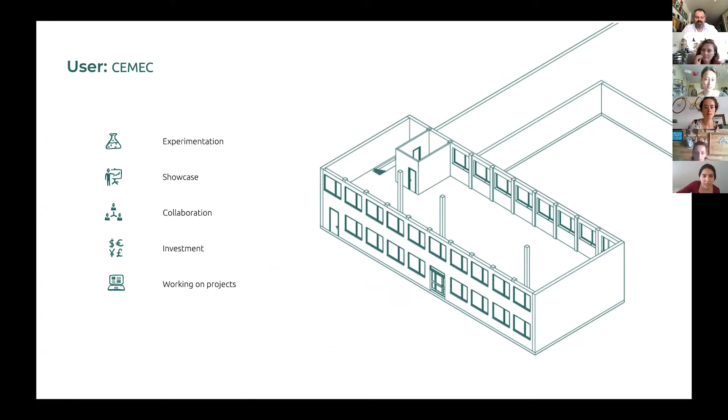Hello, everyone. Today we're gonna tell you about how the U-shaped modular furniture series are created. We designed this furniture for CEMEC, a center for circular innovations. In this center, a multitude of functions will take place, so the furniture should be ready to accommodate the changing needs. We used recyclable and environmentally friendly ECOR as our main material.

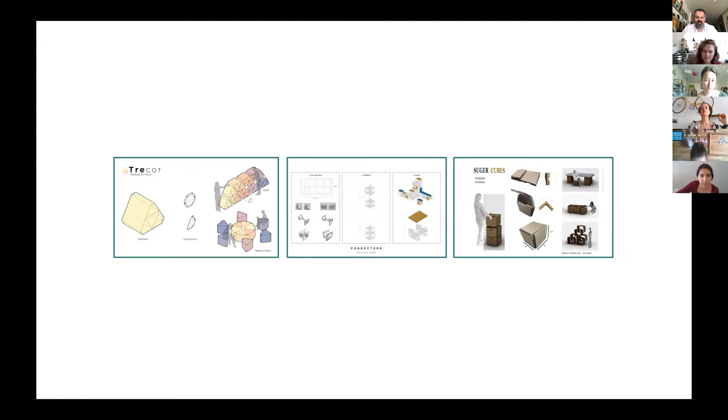The three of us showed interest in modularity in the first weeks. So Doris, Natasha, and myself, Sahar, joined to realize our vision. Our vision was to present a design which encourages the users to easily and quickly reconfigure their working environments. And these units can become storages, seating, table, as well as other combinations. This design should also support sustainable and circular principles of ECOR.

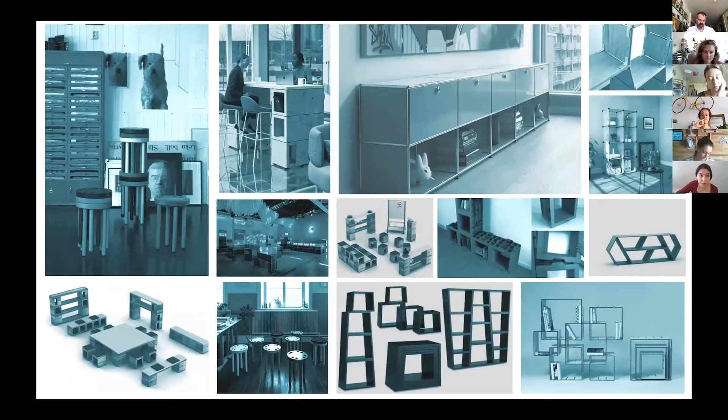We explored the existing modular furniture systems in the market, we developed our own concept, and we put them into a matrix. The concept with the highest grade was ready to be developed further. That concept was the half-box module, which was later called U-shape. It is a box with two sides removed and split in half, and the structural plane is added to the center. This module proved to satisfy all our criteria.

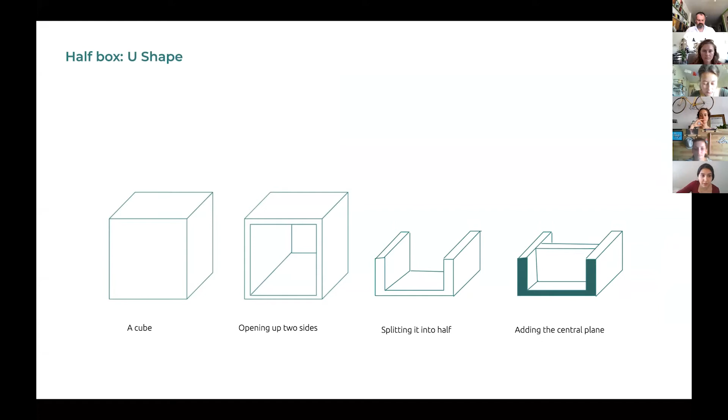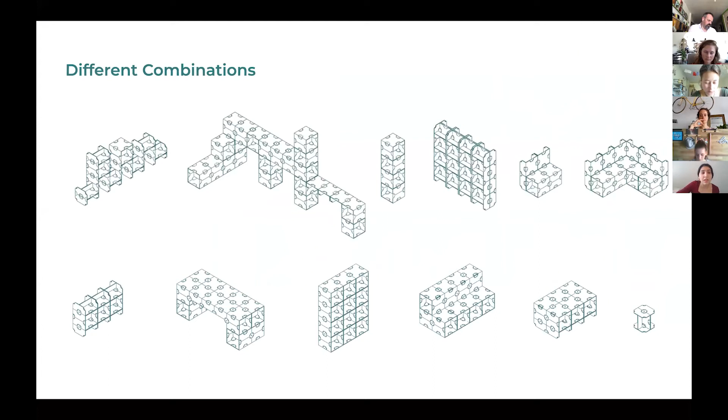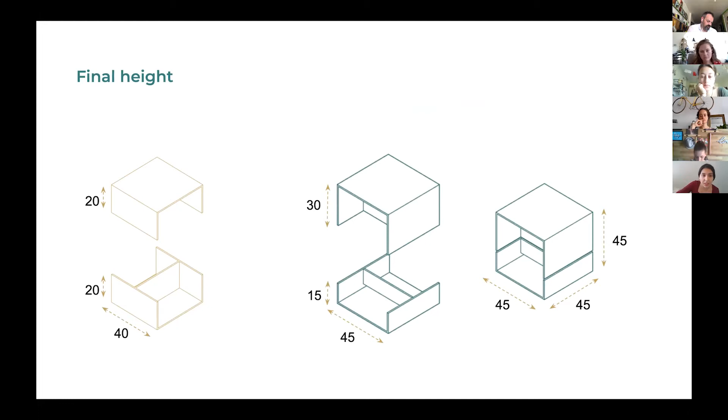We had puzzle pieces as our initial connection idea. We started making different furniture with the U-shapes. We combined the furniture into different scenarios, and we became confident that this module is promising. And then during the process, we realized half box should not be a half anymore. A cut that makes modules of 15 and 30 centimeter height proved to be very useful. With this size in a chair and desk combination, the user will have enough legroom under the desk, and the height of 75 and 45 are respecting the ergonomic standards.

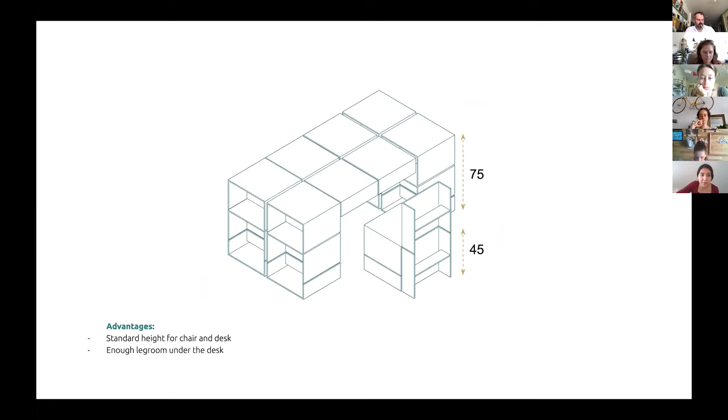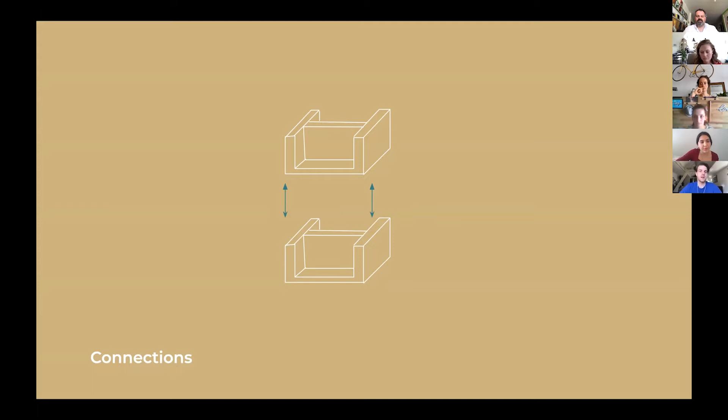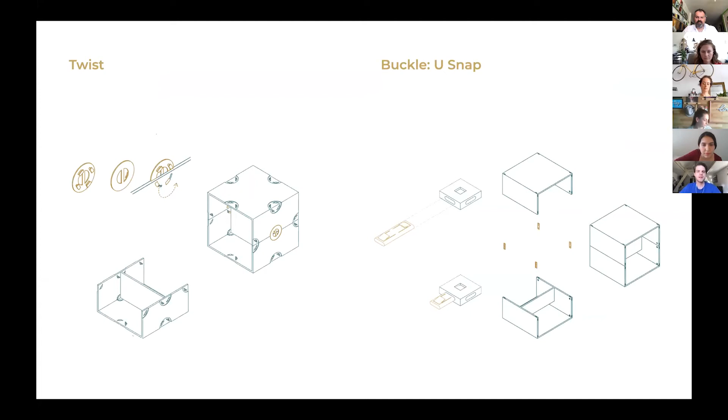After that, our next step was thinking about how to connect these modules together, and Doris will tell you more about that. Yep, so for connecting the modules together, we followed the same approach as for the module design research. By first analyzing the strengths and weaknesses of various references, we were able to come up with a variety of our own connector concepts. Afterwards, these were graded and sorted according to our own vision and design criteria for the connector. The two strongest concepts were selected for further development during the building weeks: the twist and the buckle or U-snap.

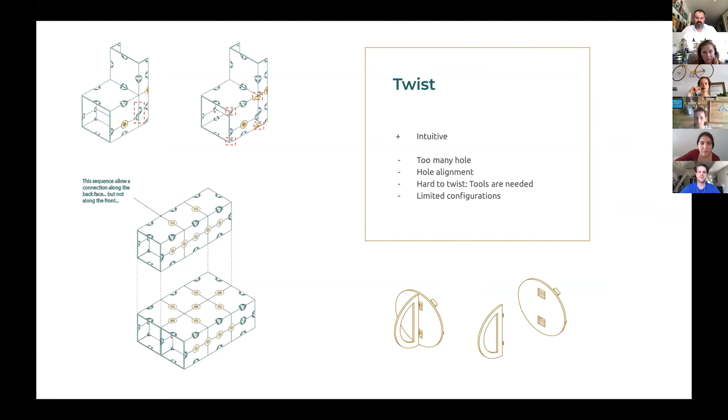Twist consists of a disc with 4 hooks which can connect up to 4 modules. It is both quick and easy to install without the need for external tools. Twist is able to achieve a lot of configurations. It is capable of connecting modules both horizontally and vertically. Despite this, we felt it had too many limitations. The modules had to be stacked and connected in a very specific order for certain configurations.

The buckle or U-snap is a connector which snaps into place using the elastic deformation properties of plastic. Because it slides in between sheets of flat core, it is discrete, fast, and an intuitive way of connecting 2 modules together. Because of this, we chose the U-snap as the most promising connector concept.

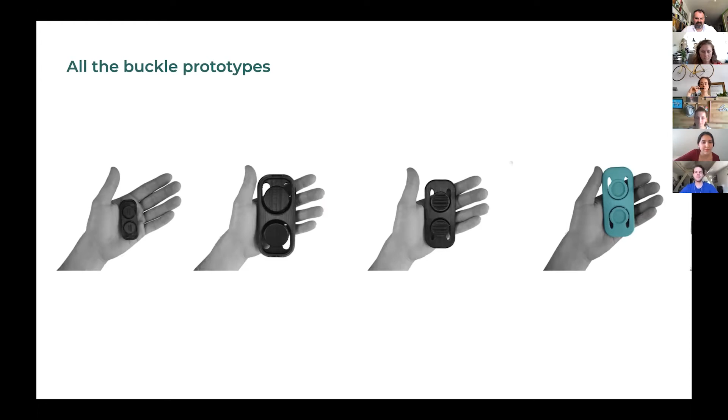During the design weeks, a total of 4 different prototypes were produced. The first prototype ended up being too small, so we scaled up the second prototype to test the principle with 18mm MDF sheet. It worked great, and because we really liked the larger size, we made the third and fourth prototype larger too. Here you can see the first, second, and third prototype being tested. By the end of the building week, we had a working prototype scale 1:1 made out of eCore, which we were comfortable with moving forward.

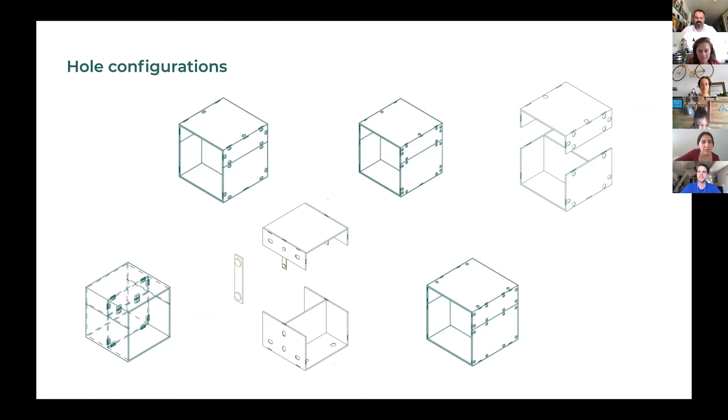We tested a variety of hole configurations, each with their own strengths and weaknesses. We also tested the principle of a larger connector with shared holes. However, this turned out to reduce the amount of configuration significantly. So in the end, we chose a configuration with only 2 holes on each side of the module, and 2 holes on the top and the bottom sheets to connect modules sideways.

A problem arises when you try to disconnect modules from each other. Fixing the U-snap into place is dependent on the movement of the connector itself. In other words, if the connector cannot move or deform, it cannot unlock. This causes problems in many scenarios where multiple connectors need to be unlocked and moved simultaneously.

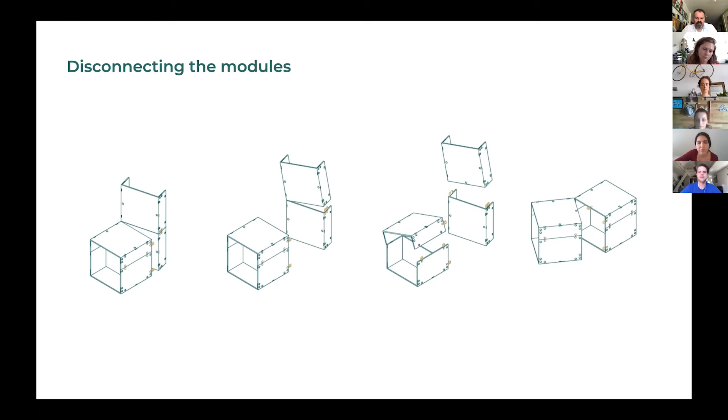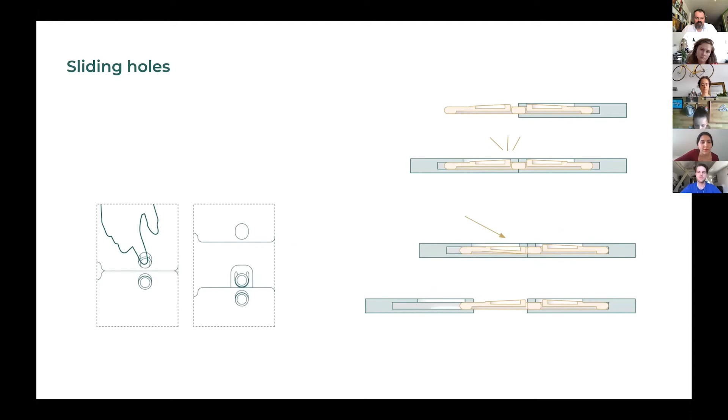To solve this, we had to make the locking of the connector independent of the movement of the connector. By elongating both the internal and external holes, it is possible to unlock the connector while still keeping it in the same location. This means it is possible to unlock multiple connectors simultaneously before starting off the module.

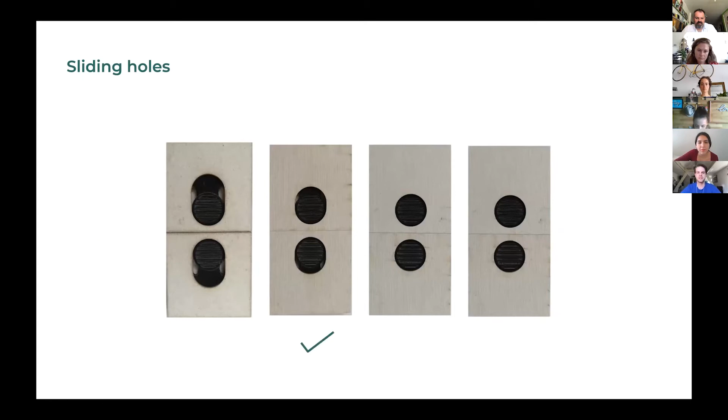In the building weeks, we determined that an internal and external elongation of just 5 millimeters worked best for the U-snap connector. Finally, the U-snap design was completed by adding a hole to the bottom, making sliding easier to do.

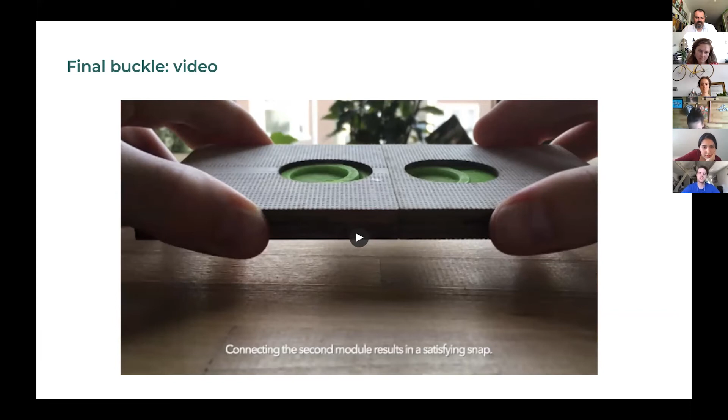So with both concepts for the module and the connector done, we were comfortable moving to the refinement stage, which Natasha will tell you all about. Yeah, so we reached a point where our design was beginning to take shape, and we took some final steps to make it into a finished product.

And we had initially aimed for the modules to create a desk based on the arrangement on the left, but we realized this wasn't going to work very well due to the moving sliding connection, which would always result in a sag in the tabletop. So we needed a tabletop which could bear onto some supporting modules as opposed to relying on the connection, as

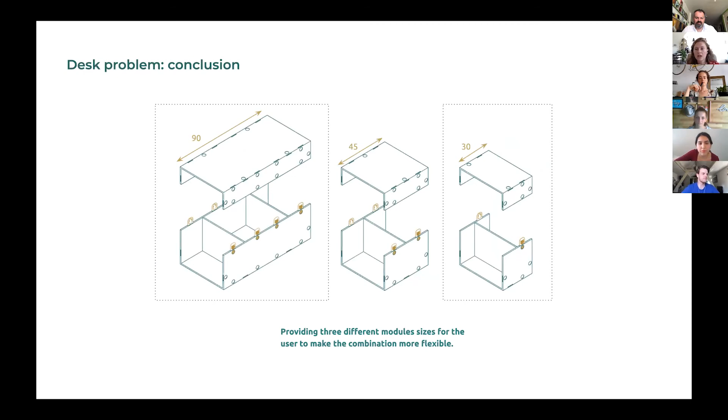shown on the right. Therefore, we introduced new module sizes that are 90 and 30 centimeters long, which allowed us to make much more usable tables and chairs without relying on the connection. And you'll see these in a few slides. We also looked into the finer details here, such as rounding the corners for practicality and adding a handle to make the units easier to carry.

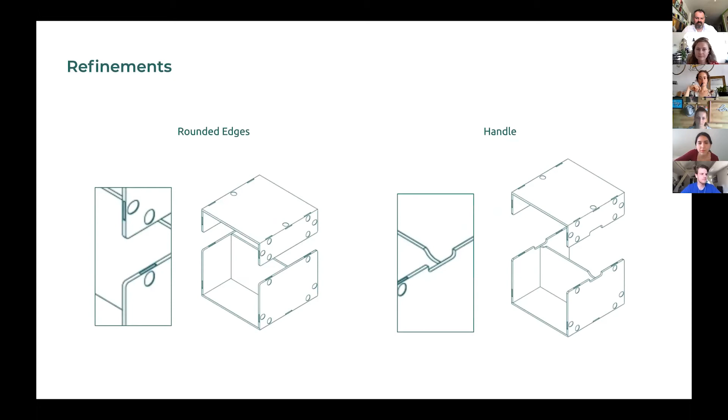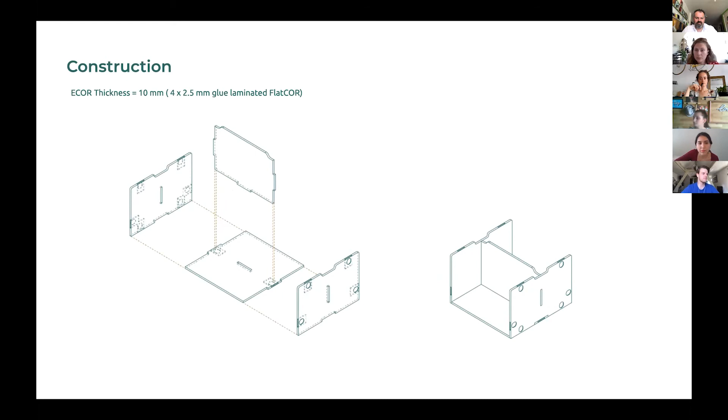And this then led us to think in more detail about how the modules will be built from ECOR. A 10 millimeter thickness of ECOR was selected based on the thickness needed for the connector and the strengths of the modules themselves. And we decided on the arrangement shown here, which uses tabs slotted into holes that are then glued in place. And we have two options for how the units might actually be produced.

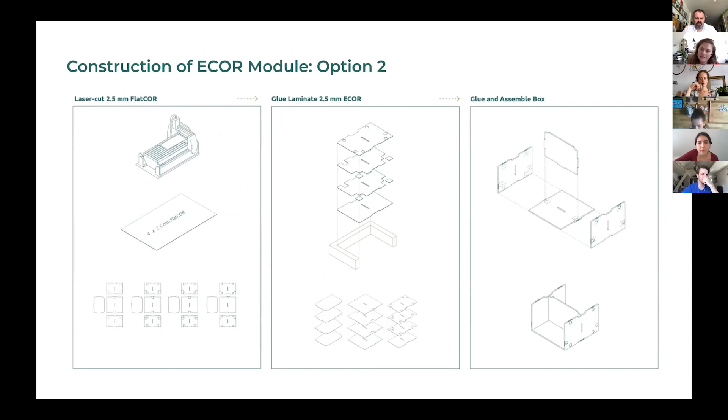The first involves laser cutting the pre-laminated 10 millimeter ECOR, then manually drilling the holes for the connector after. Or the second option, where you laser cut 2.5 millimeter ECOR, incorporating the holes for the connector in the laser cutting and then laminating, which reduces the manual processes, but both are viable options. And the U-snap is made from injection molded recycled plastics.

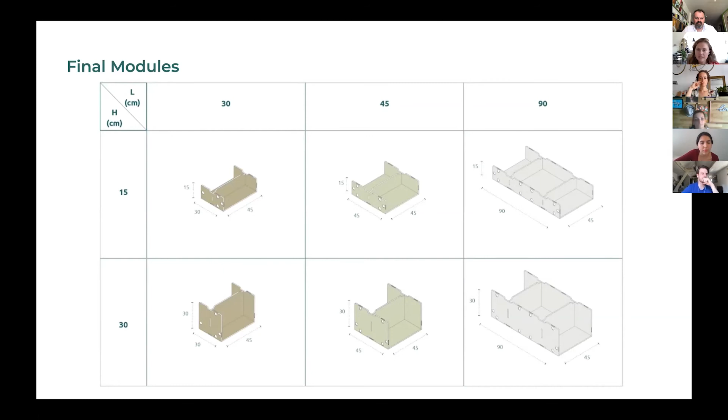And so the final modules are shown here with their dimensions, all have the same width of 45 centimeters and varying lengths and heights. And to connect these modules together in multiple directions, you use the U-snap connector, which the principles were explained earlier and shown in the video. And then these can be used to create lots of combinations.

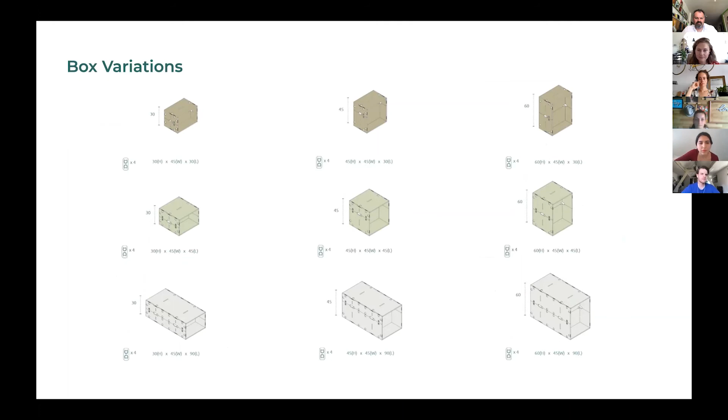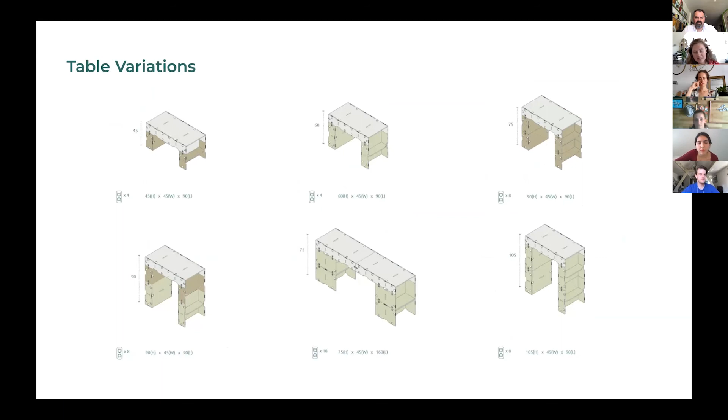Here are the variations of box sizes, which are probably the most simple combination. And table variations, which we're showing 6 standard ones here, but there are lots of others. You'll see there's a 75 centimeter height, creating a sitting desk, and 105 for a standing desk.

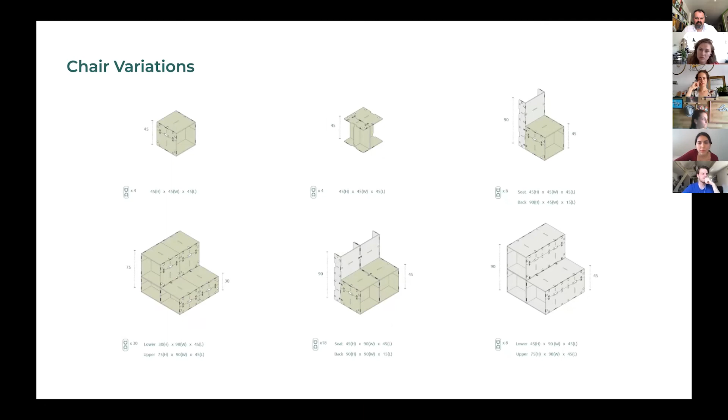And again, a few of the chair variations are shown here, which can be stools or chairs with backrests, which can be joined to make benches and step seating. And also the variety of storage systems, which may be more permanent pieces and reconfigured less frequently. And these individual pieces can then be combined to provide the setting for various working scenarios.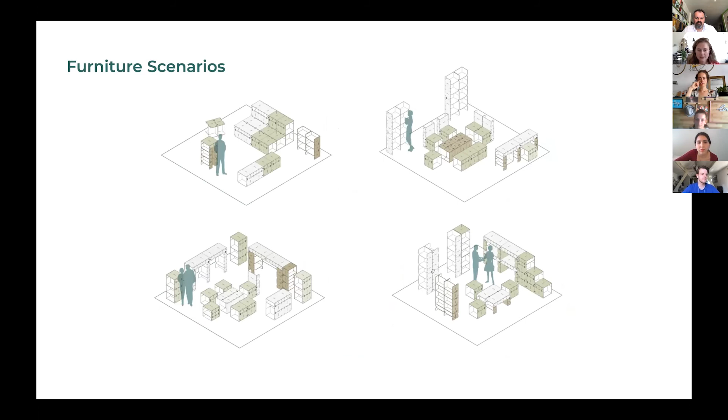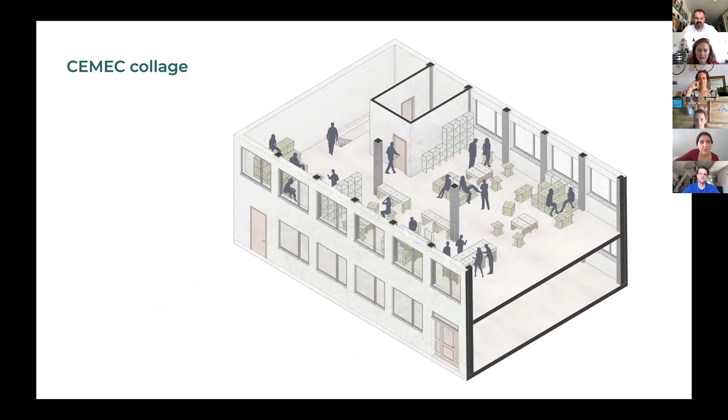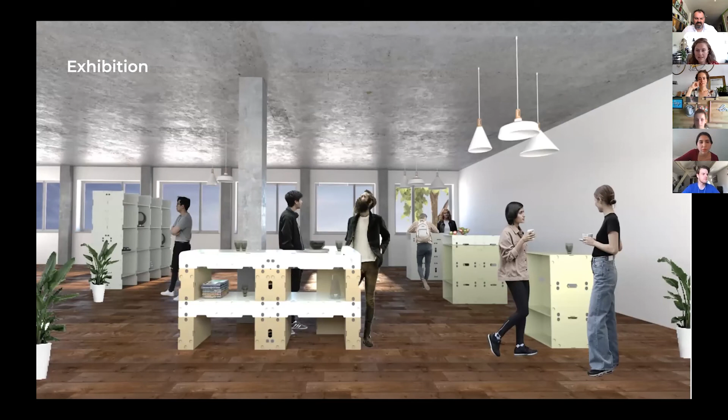And this is how we envisage U-Shape being used within CEMEC, so for social areas, but also meetings and presentations. And we've created some impressions of the furniture within CEMEC. So here is a presentation scenario, which could later be rearranged for events and exhibitions to showcase new products. And equally for more casual settings, for relaxing and socializing or informal meetings.

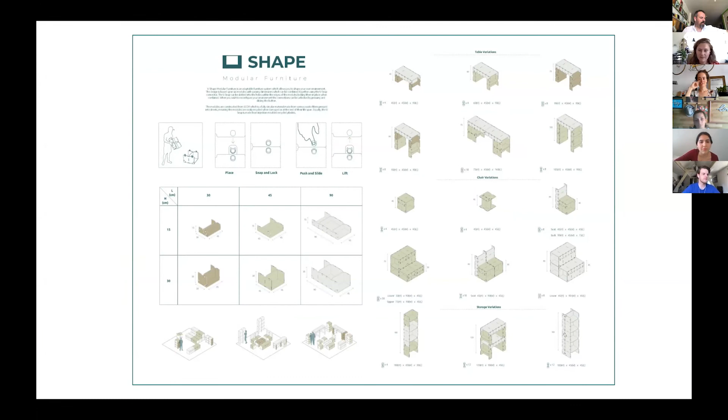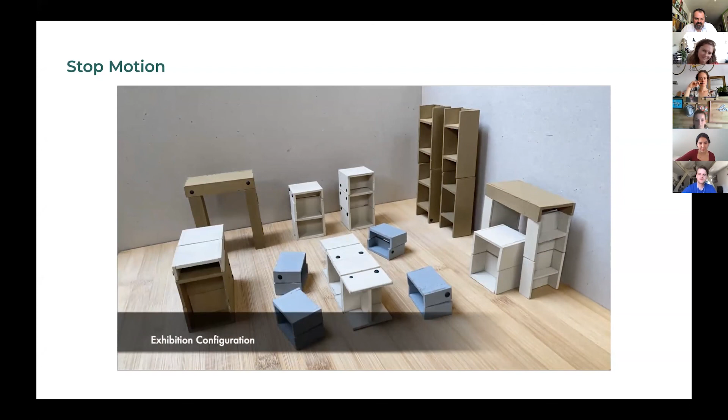Hope you saw the little waving man at the end, because that took quite a while to do. But yeah, thank you for listening, and please let us know if you have any questions.

Thank you very much. Impressive. Looks very nice.